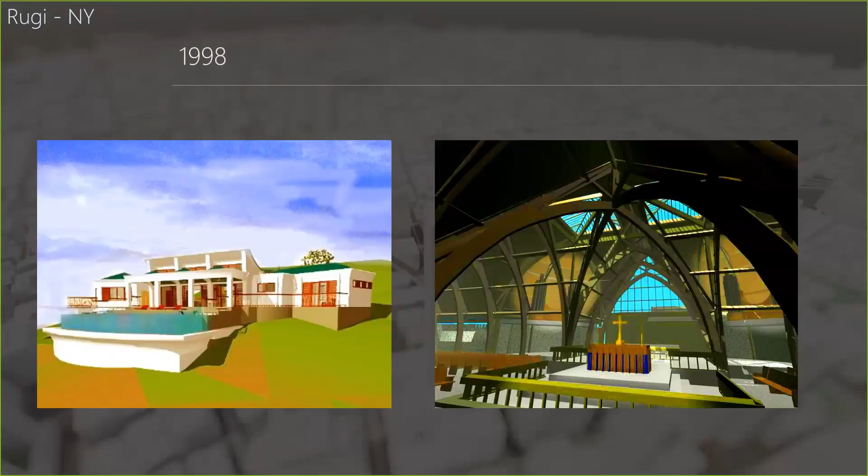My first Revit project was the Lincoln Center Theater in New York City. This was Revit 2.0, I believe—I started using it around 2001. We started in ArchiCAD, and then Revit came out, and I was like, this is the way to go. We started modeling that and actually doing ductwork coordination back then. And I was thinking, within 4 or 5 years, the whole industry is going to use BIM 100%—there's no way you're going to use CAD after this.

And I feel there's still a lot of offices with one leg in CAD, one leg in BIM and Revit and so forth. So it's just funny looking back—it still kind of looks the same, Revit. You can see there were a lot of issues we found there, a lot of big stuff in this tight rehearsal space on the Lincoln Center Theater. It's a phenomenal building, it was a lot of fun working—well, my first project in New York City.

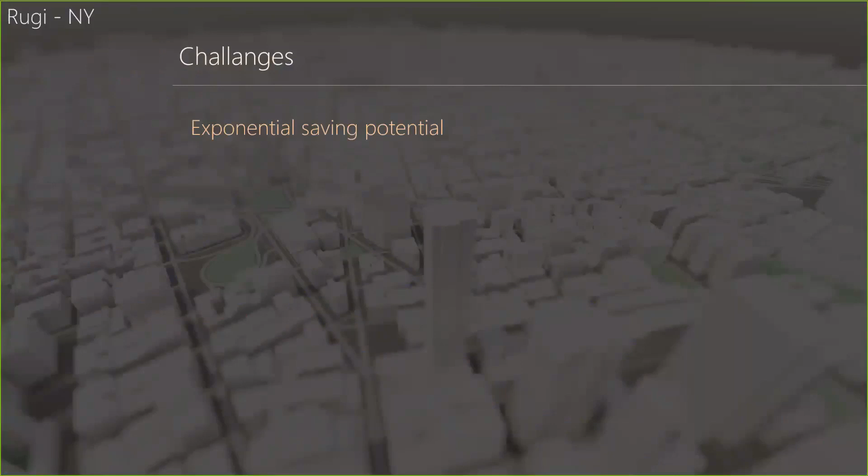So, not 20, 19, 18 years later, we're still having challenges implementing the technology across the board. My team is sort of vertically integrated—we have architects, engineers, construction managers, and now even facilities management in-house. We're finding there's exponential savings. In certain areas we can save 90% of time through automation of drawing generation, but the most important thing is the data that we're really harvesting and working with.

But as I mentioned, it's also exponential complexity if not managed properly, and I think that's what happens in many cases. What we're noticing, looking at most architecture firms, is the 'I' in BIM is not really considered at all—the goal is really creating drawings and renderings, which I understand why, but I think there's a lot of missed opportunities.

And I think it's starting to happen—more people are learning programming and using Dynamo in Revit, things like that. So you can actually start becoming aware of the power of these tools from a data perspective.

I think a big part there is during construction, it's kind of all about data. The weird thing in the construction industry I'm seeing is they're not data people working there. So I think a way of connecting this stuff together is what we're focusing on now. We call it VDCO, Virtual Design Construction, and we added operations 2 years ago because we're working a lot for owners and agencies in New York, implementing this kind of stuff. The real beneficiaries are the owners if they operate their own buildings, there's so much they can do with the data coming out of this. But if it's just a disorganized mess of data coming at them, they don't know what to do with it. So it's all about how to organize that data.

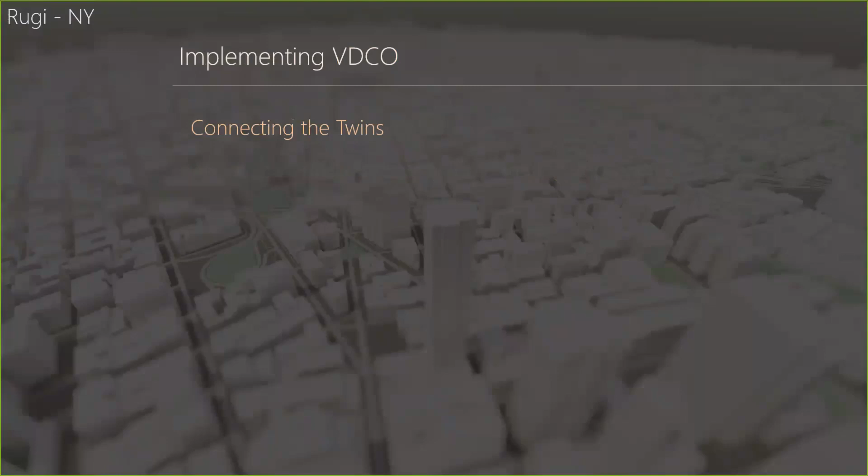Talk about digital twin - it's really connecting the virtual and the real together. Because now we have the digital twin, but is it connected to reality? Not really in most cases. The moment you hit the construction site, they're starting to have models in the field and things like that, but the whole thing of really connecting it to the day-to-day inspections, installations, and so forth - it's getting there, and it's coming really quickly, and I'm very excited about that.

One thing we realize is the different lenses, right? Design and architect look at something in a certain way, the MEP look at it in a certain way. All the different consultants have their way of looking at the same project, but they want something different out of it. Same thing with contractors and owners. So you have a list of the people - planning, design, project support, cost estimators, schedulers - there's so many people involved on a project, and they have their thing they want to get out of it.

The trick is, how do you get them all to work off the same data source and make it work? So we're standardizing the underlying data for this stuff, and it works when it's standardized, but there isn't any standard out there. So that's one thing we're trying to get to - can we agree on some sort of data standards here?

What I'm focusing my career on right now is the delivery points between, because that's where the inefficiencies really happen. From planning, design, and procurement, depending on what kind of delivery model you have - but this is the sort of traditional common one, especially in New York. It goes to bid, and the contractor does it, then the handover and operations. In many ways, you start from scratch every single time, and the bigger the project is, the bigger the chaos. We're involved in some massive projects, and it's just baffling that there's no connectors between the different phases.

This is sort of the mission statement of my group - making it easier for the whole team, every person. But this really comes down to people in the end. How do you get people to work together, communicate? You understand the problems and communicate that. And that's one of the problems in this industry - it's hard to identify the issues.

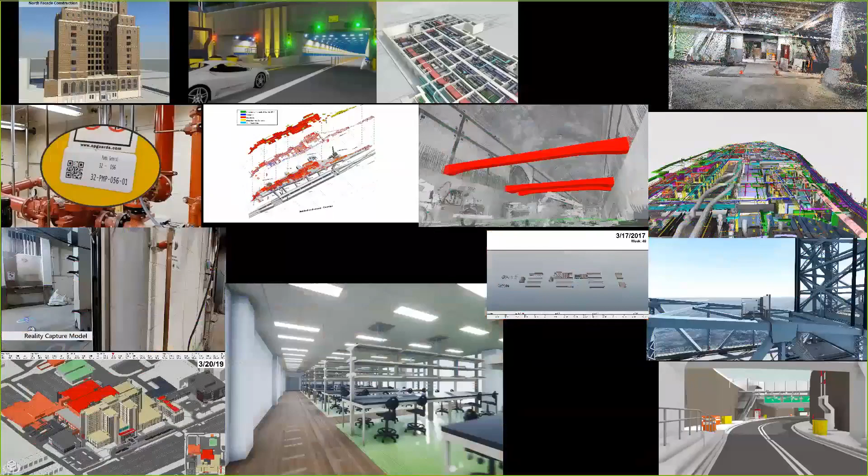So I've been with LiRo since 2000. I've been on over 100 projects now. We're talking about a lot of projects, we're working on things right now. This is a snapshot, but very close to all the different infrastructure - train stations, massive dollars, hospitals, schools, police and fire stations, tunnels, bridges. The data structures are the same, maybe how you organize a tremendous amount of them differs.

So I was going to go next. I talked previously here about it, but after that I'll go into detail. I think what's interesting is we've been involved for 7 years now on this project, the biggest infrastructure project in the United States, and it may be the biggest in the world. I was told by others 2 years ago that maybe it's a bigger project out there - I don't know, but it's a massive amount of models to be connected.

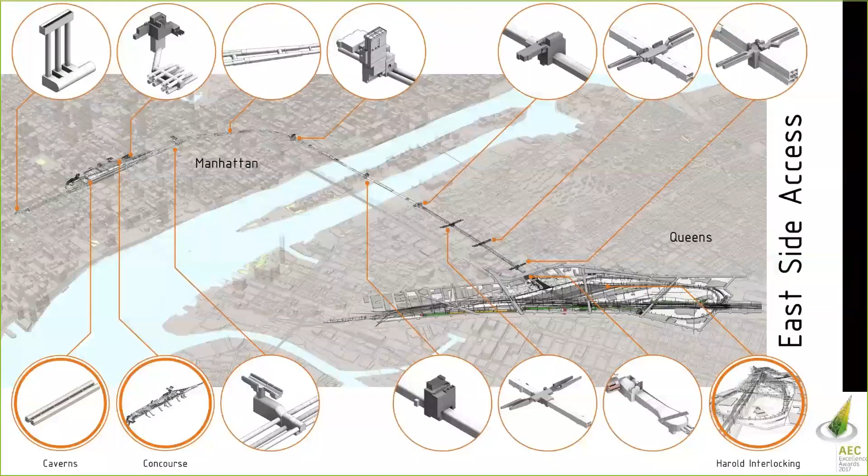Also talking about finding similarities, we're dealing with pretty much every agency in New York: MTA, CUNY, DASNY, the Department of Design and Construction, EDC, the Economic Development Corporation. You see the same problems everywhere - communication, documentation, fragmentation. We're running pilots with all these organizations, and you realize when you actually connect yourself, a lot of these issues go away, and we can start seeing what the real problems are.

So it's really form and data - that's what we're looking at in my group. This is really where we're creating, and BIM is about that: the geometry and the data you're logging. The way our approach now is using Revit as the form and data repository, connecting it to a database.

Not all data needs to live in the Revit model, but we're creating connectors, and this is where it gets really interesting, because we can shoot data back to Revit, spit out graphics, reporting, and things like that, using automation as an interesting tool. What makes Revit unique is that you can create drawings from the model - there's not many other software you can do that so well and still have 3D.

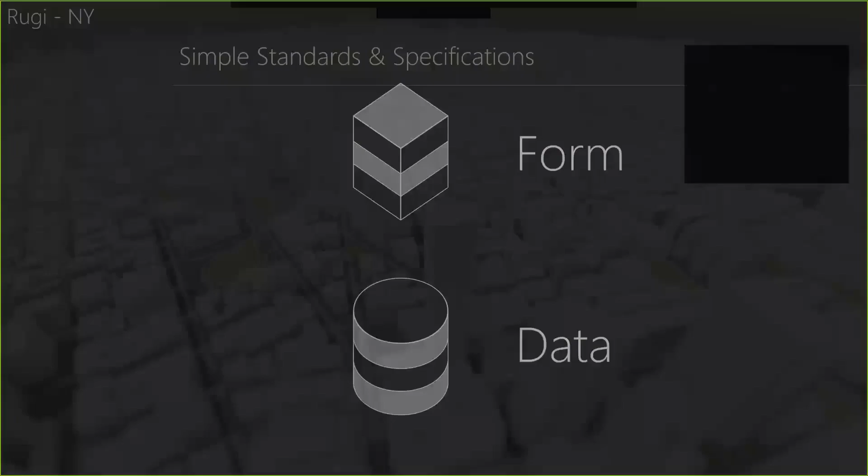One thing we realized is we can't do this, and we're not going to model everything in-house. So for example, today on Bridges and Tunnels, we wrote the standards - writing the data standards, writing the breakdowns, but doing it in a simple way. Has anyone seen the National BIM Standard? Has anyone read it? No, exactly. So our approach is really to shrink it down to the bare minimum.

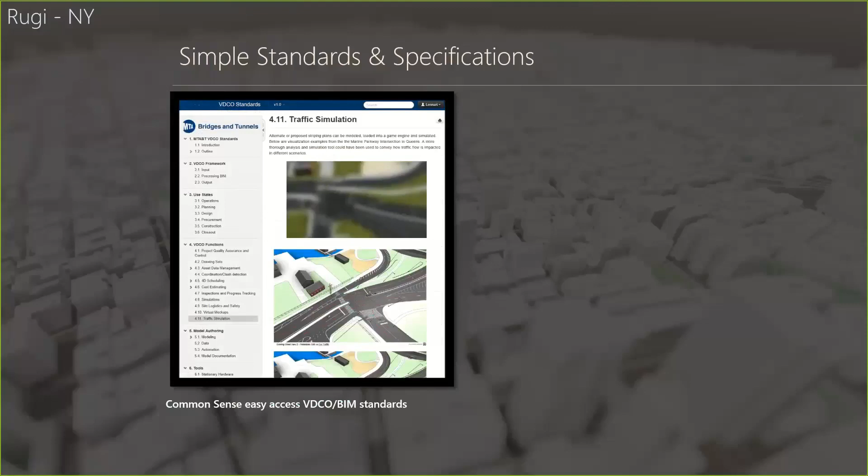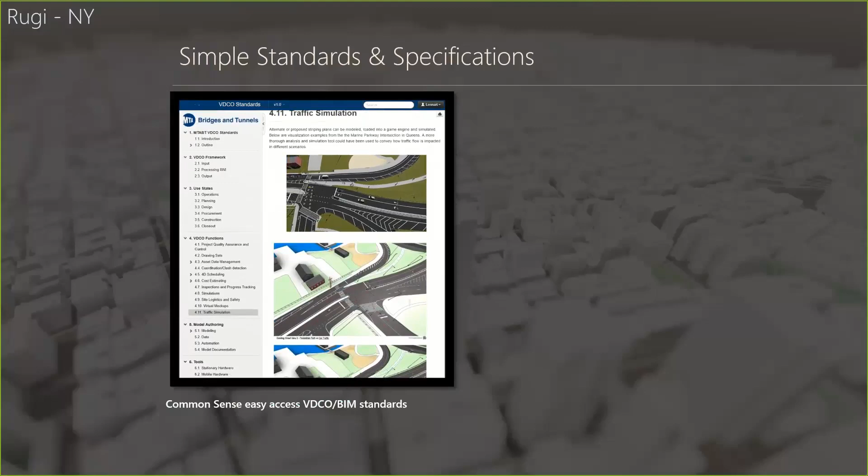It's actually people who read this stuff, and we created a website instead of a binder. You can browse through it, and there are real examples, tutorials, and things like that, so people actually engage and learn this stuff. We find people actually start wanting to read these things, because it's not just fun, it's illustrating, and you're actually learning something by doing it.

So we're digitizing all the bridges and tunnels in New York, and we're saving them a tremendous amount of money. Their budget for the next 3 years is $2 billion, so it's a drop in the bucket, the stuff we're doing.

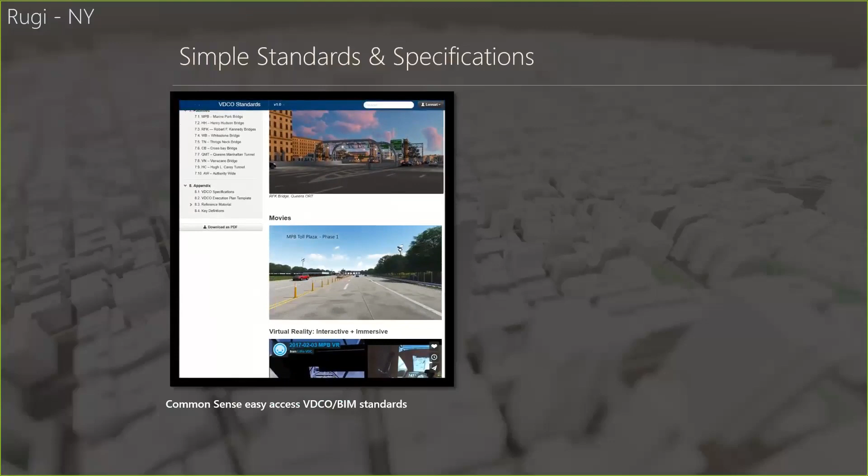But really, using Revit in the correct way, we're shooting it into visualization and game engines, then using the data to actually do phasing, putting cars in, communicating very quickly. We realize we can turn around some of these things in a day because we have the models set up, we're organized, and we spit them out.

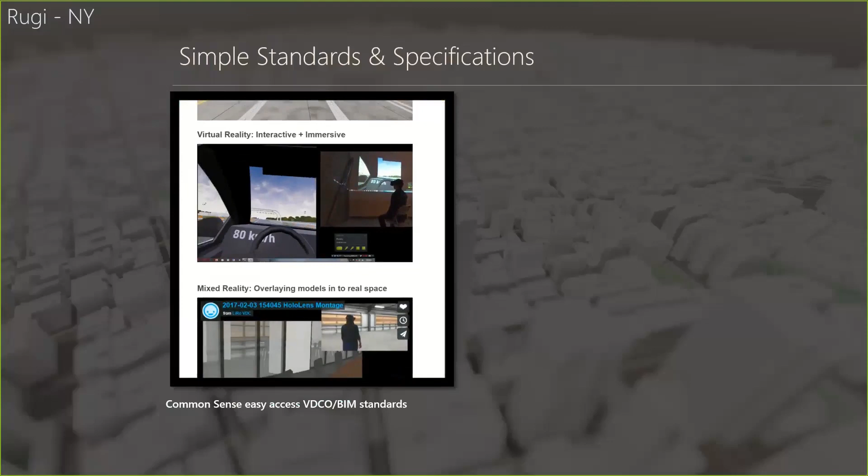Obviously, using game engines for virtual reality for this particular scenario, actually driving through has value. It's not just fun, but they can actually review how you experience this at 40 miles an hour and so forth. So it's the stuff around Revit now that is really becoming where people are interfacing.

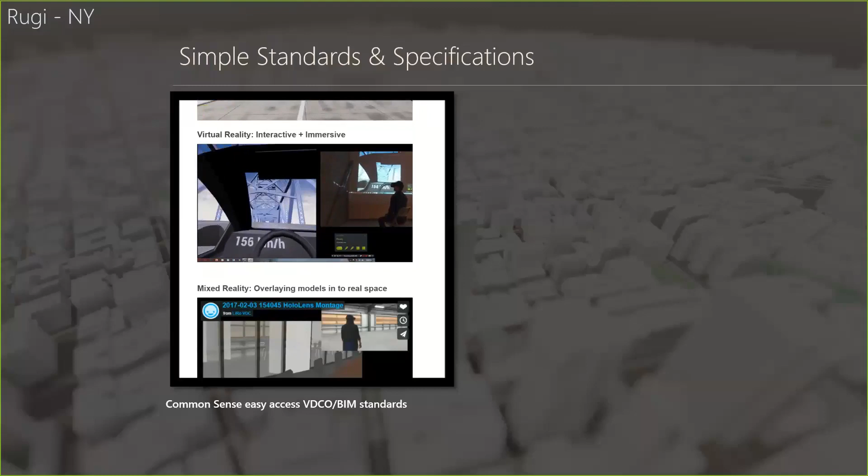I think having to send people to training to be able to be part of the BIM process is not going to work, because you have so many people involved, and people come and go. So we're finding we have to make it simple for people to actually contribute data to the models - that's where we started to develop applications on top.

So in the field, you can then input statuses, give feedback, take pictures, shoot that back, and also connect to reality capture and so forth. That's going to jump to next.

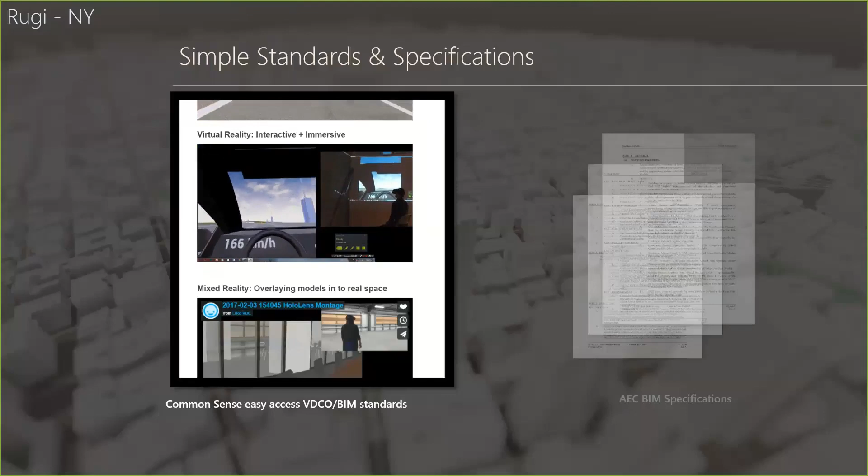And then we have written the BIM specifications, which is a very important aspect - the rules of the project, both for the designer and for the contractor, how they're going to run the job. It's really breaking down the key components in Revit, the settings, things like that, without getting too extensive. But these are the key things that we find really important.

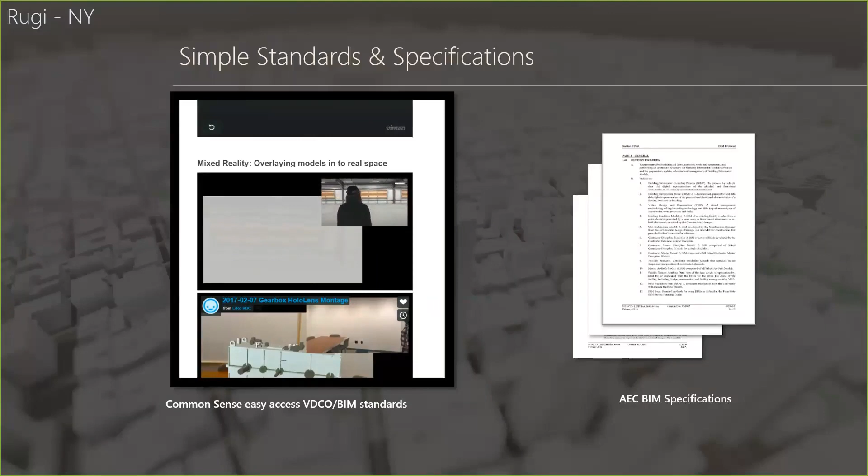So we go here - one thing we have, some guys from NavVis scanning. We actually acquired one of their scanners because we do so many big projects.

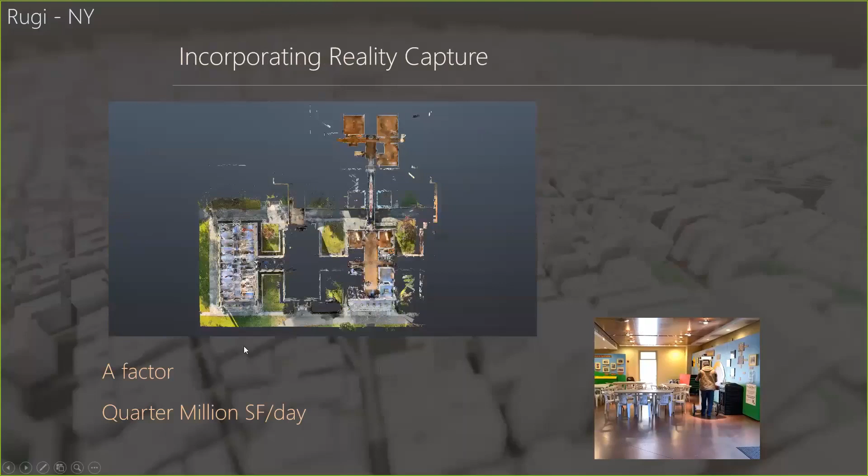What's cool with their technology is that you walk around and scan. We found a tenfold increase in the amount of scanning we can do, so we can do it 10 times faster than with the tripod scanners. So we can scan massive areas. This is actually a smaller piece of what's now the whole campus that we've scanned. We can interact with that and really look at it, and it's a game changer. We can quickly then generate models from this.

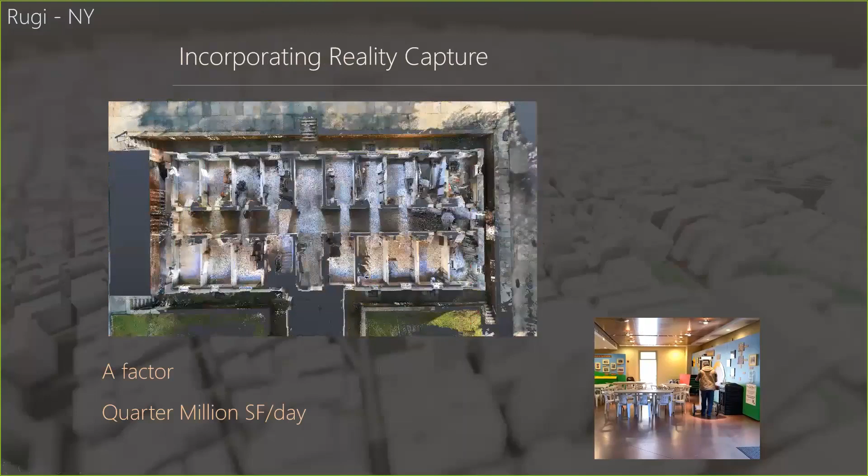What's really interesting with this also, I think, is this is Snug Harbor out in Staten Island that I didn't know anything about before we started this project. But it becomes a historical record as well, because they're going to renovate this place. This was where the sailors used to live when they were retired back in the day. Now it's going to be art studios and really cool spaces.

So how many people here use scanning in their practice? So say around half, right?

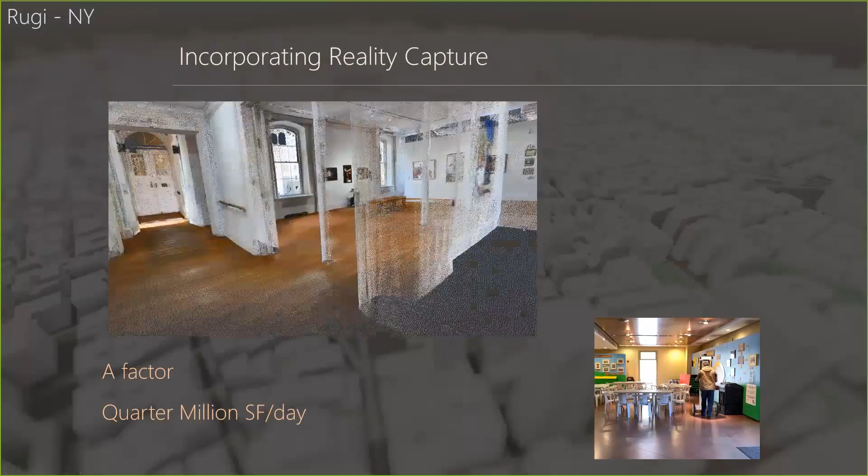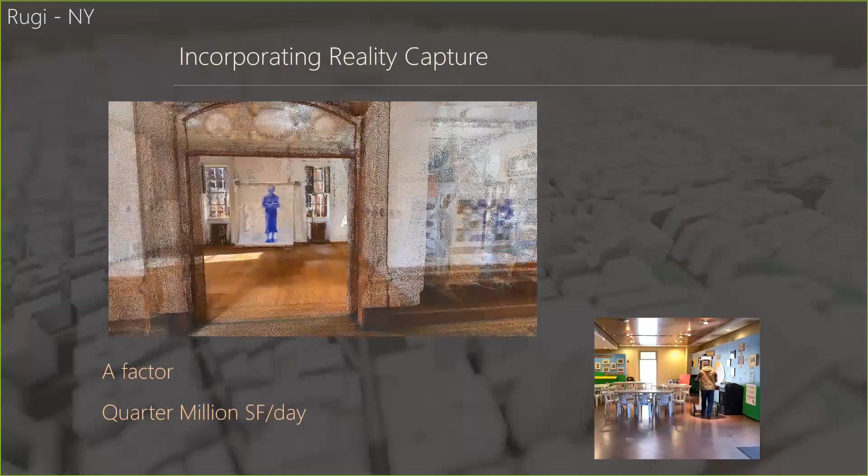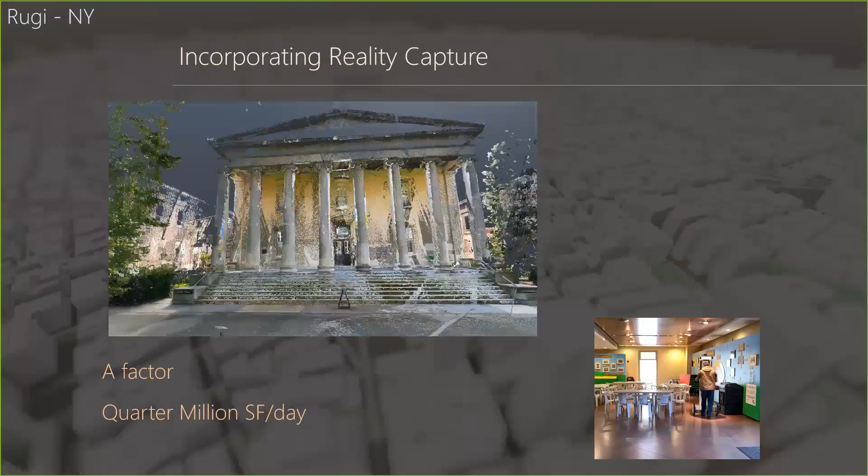One of the things we're realizing is that when you get that in and get a workflow in, it just elevates the standard of your project. And now we start using the scans and some of the viewers as a way of actually - so it's not about the point cloud only, but it's about the images and how you start interacting with the scan models and connecting that back to Revit and back and forth. So I'll go to the next slide here.

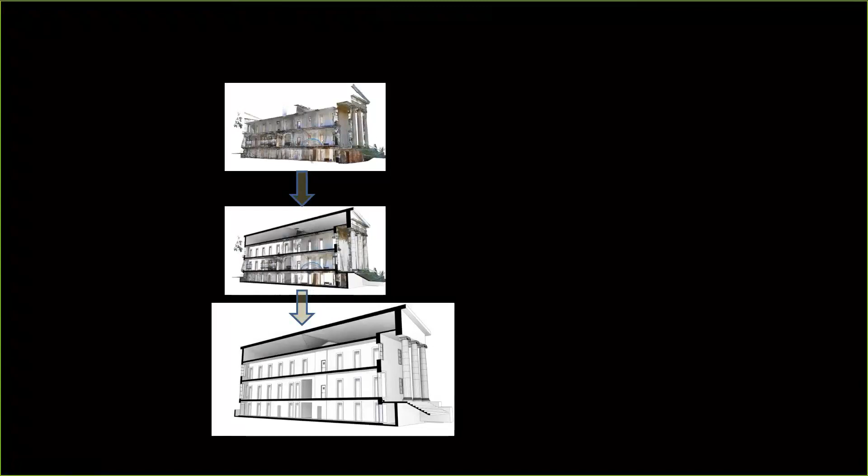What we're seeing though, the scanning and generation of models - it's a pretty manual process still, but there's a lot of tools coming out that I've heard about. Some you can already do some automated modeling with, but I don't think it's there yet. It's coming where you can do more feature extraction from the model, so you can cut down the modeling time of existing conditions tremendously, and then obviously spit out drawings.

We're using automation tools in our office, especially for high-rise buildings, that automatically create all the floor plans, all the sheets for those plans and occupancy. So say a 40-story building, we can set that up really, really quickly and then create many, many more drawings than a typical drawing set has.

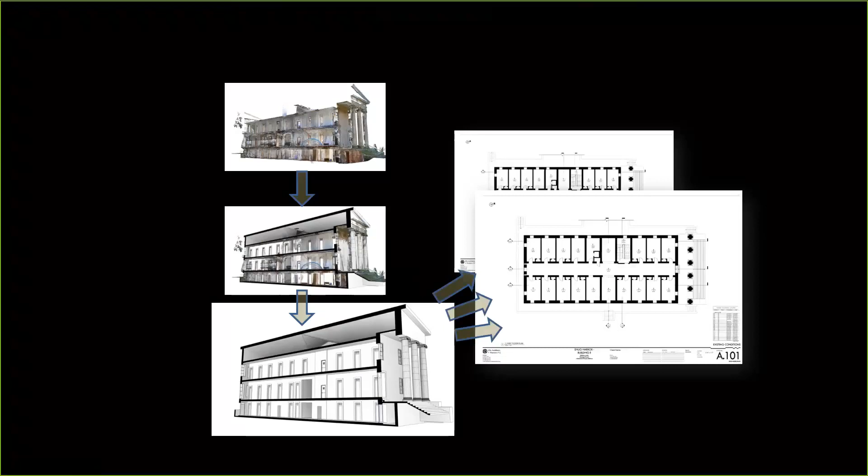We create what's called an asset management drawing set in design. So all the assets are already tagged and color-coded, so the facilities management department - we give it to them and say you guys fill out and see how you want this information. It really changes the game, because traditional drawing sets are split up by trade, and you realize the end user doesn't care about the trade. He cares about: is this equipment, how is that connected, how does it work for me? So it's really about overlaying everything and color-coding, making it easier for the end user.

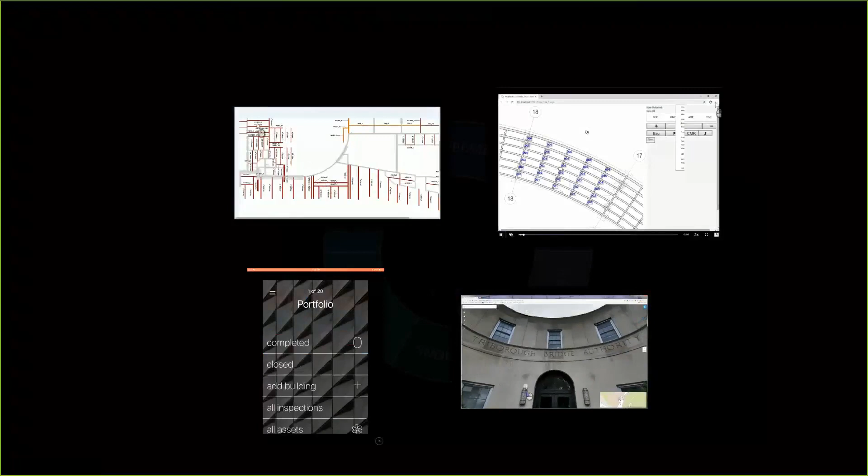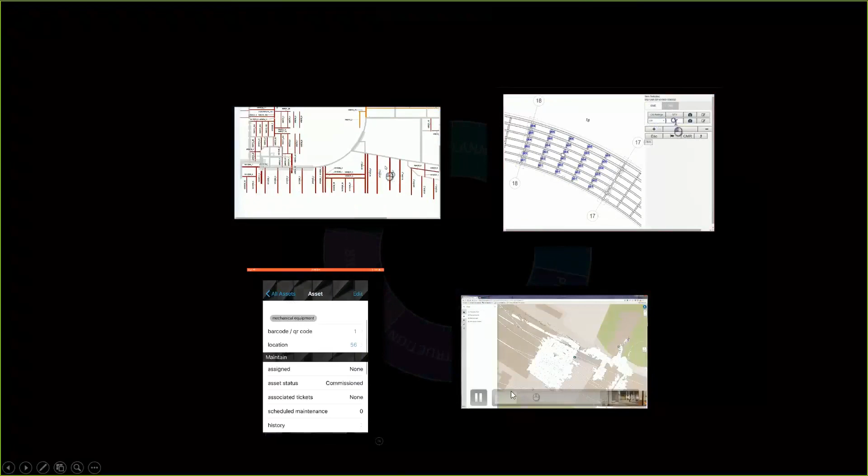So we're finding ways - we're using different apps for construction tracking, for inspections of existing facilities, facilities management tools, slapping QR codes on equipment as it's being installed, linking that back to the model. Also there's the scanner where we can then do massive facilities super quick.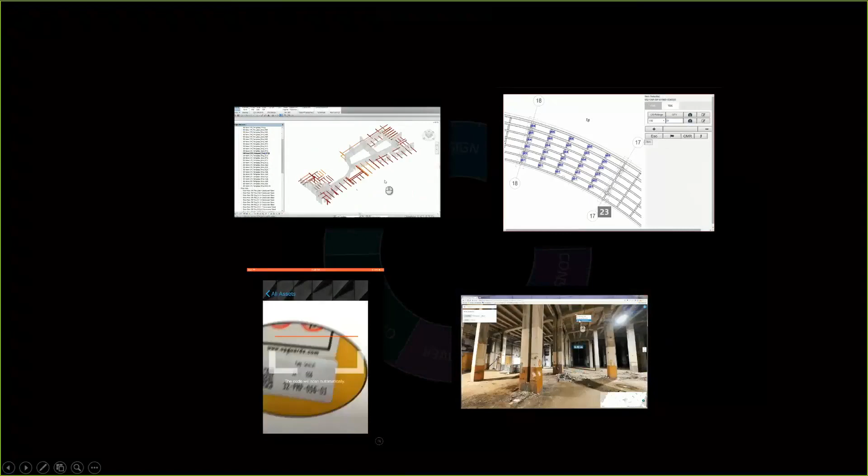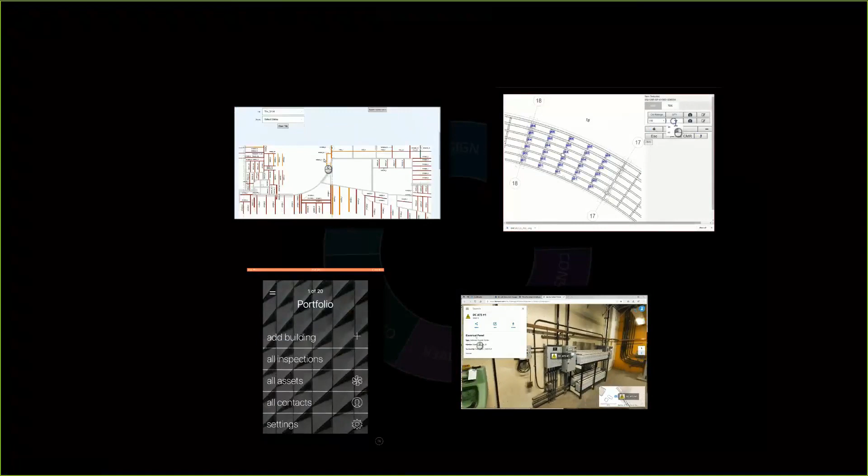It's a website, so our clients don't need to install a single piece of software. They need a connection to a web browser, and they can use all these tools. So it's really about making it easy for the end users to be part of the BIM process, because I think that's where it starts falling apart out in the field - the moment they have to install Revit or other costly software, they're not part of the process anymore.

So what I said - it needs to be standardized, and we're finding that when you do that, it has to be self-organizing in many ways with these softwares and things. So it doesn't just push a piece of paper behind - that's often what I see a lot of projects do - but it should guide itself as far as how things are input in the model, so the right people don't need training and stuff like that. So simplicity is the guiding principle for everything we do and develop.

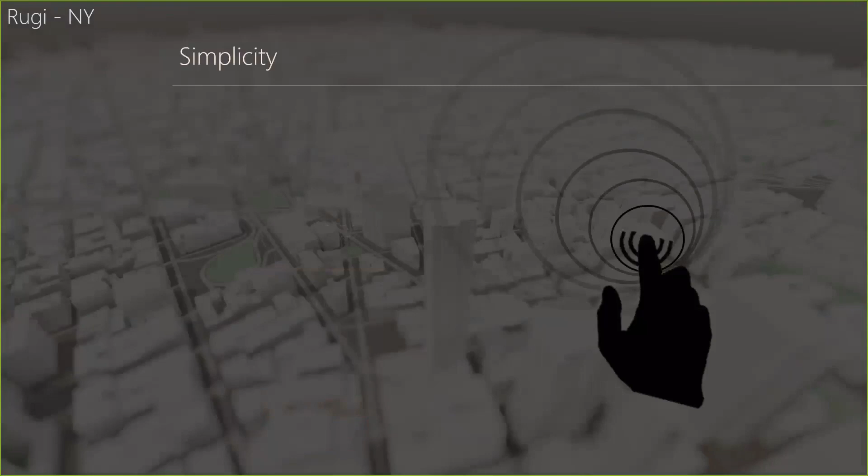We call this thing Form D for all the apps we're developing now, because we create forms, organize data in a very easy way, and fill out forms in the field using a simplified graphical interface so they can input data into the Revit model in the end.

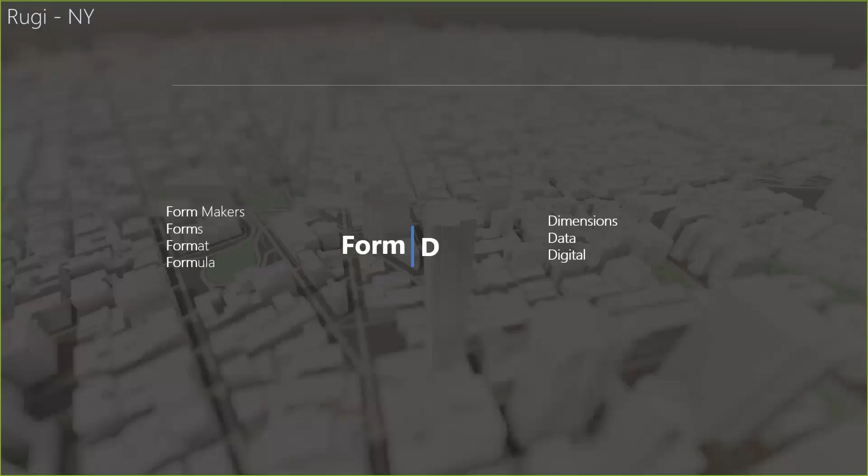They did a commercial for the American Society of Civil Engineers. What's interesting is the level of detail on the models now—existing conditions scanned into models, every nut and bolt fulfilled. Five years ago we couldn't do this because the model would be too unwieldy. It's all about how we organize it to break it down.

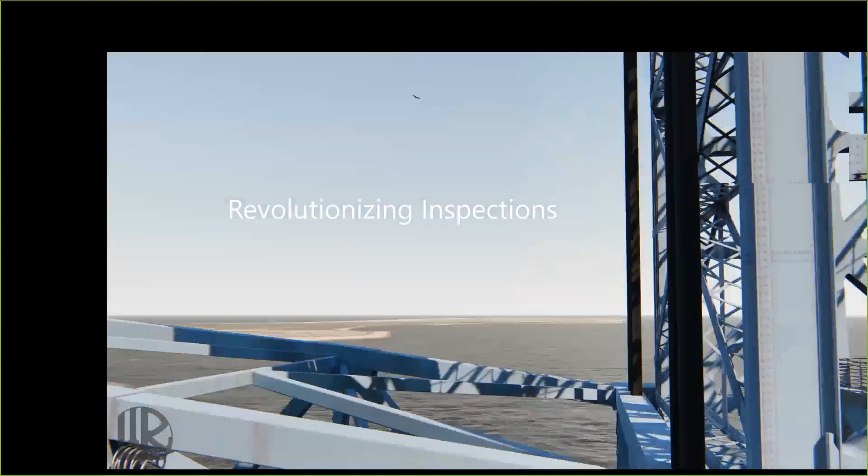But then we can do the true digital twin, simulations for parsing, even gravity simulations, and apps on top of that. We're running a pilot right now for the MTA bridges and tunnels—we scanned the whole facility in a couple of hours.

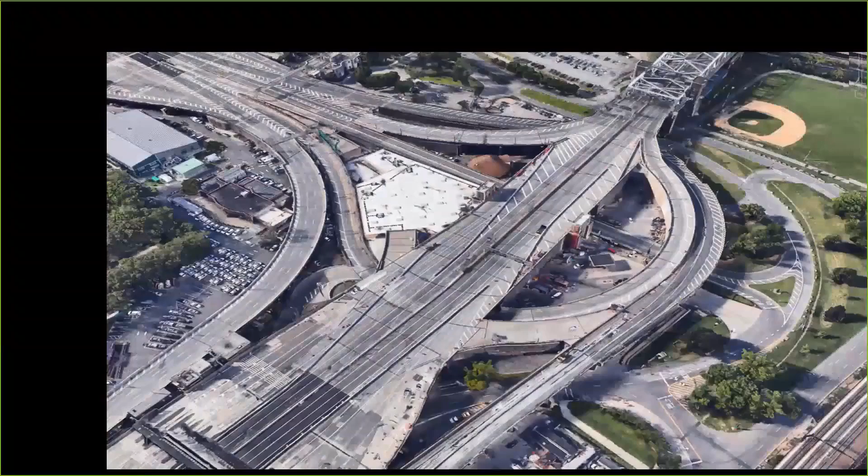We scanned this, generates models, and codes it automatically based on the system they're using—the universal bridge inspection format. This is a big deal; there's millions of data points.

Now there's an app where the guy in the field just clicks and sets the status. The amount of time they spent before on pieces of paper, taking pictures, and then months trying to assemble it all.

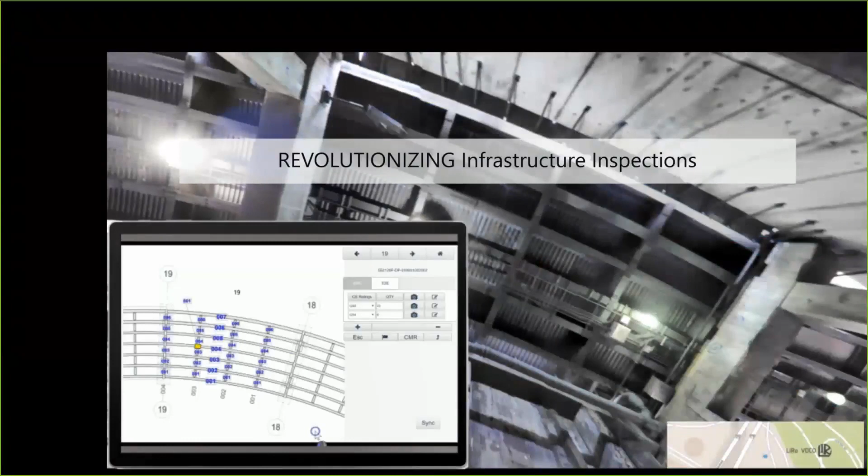It's now completely automated. You go out in the field, set the statuses, and it color codes everything based on status, so you can communicate what needs to be fixed, what's critical, and help plan. This is one of their reports, right there on the left.

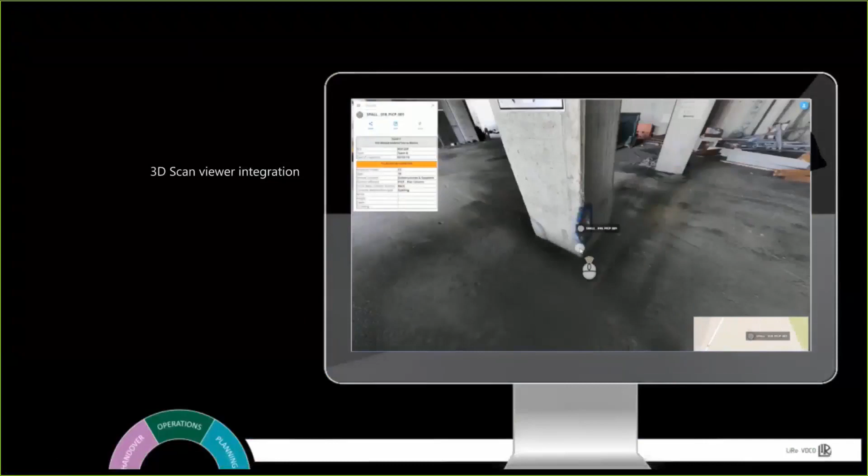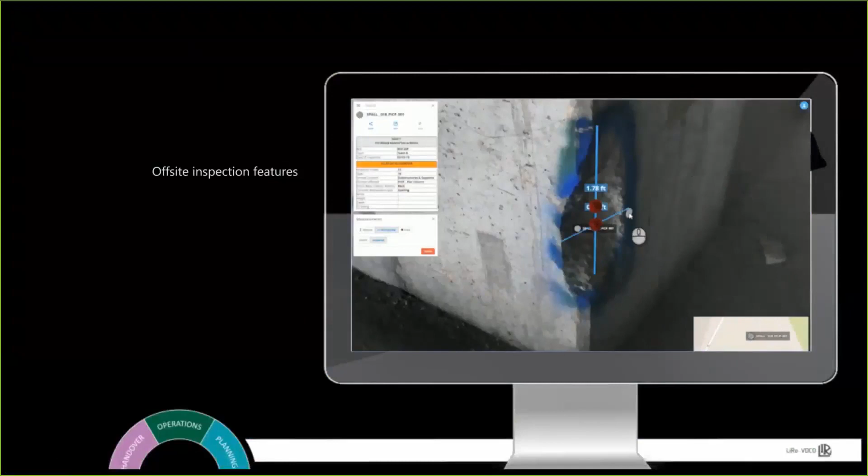It's an enormous report. We're digitizing that as well, tying it back to the Navisworks viewer, where all the issues found get shot back into the viewer. Someone can sit in their office and actually look at the issues and even measure them there—really cool stuff, because the BIM model is aligned with the scan model.

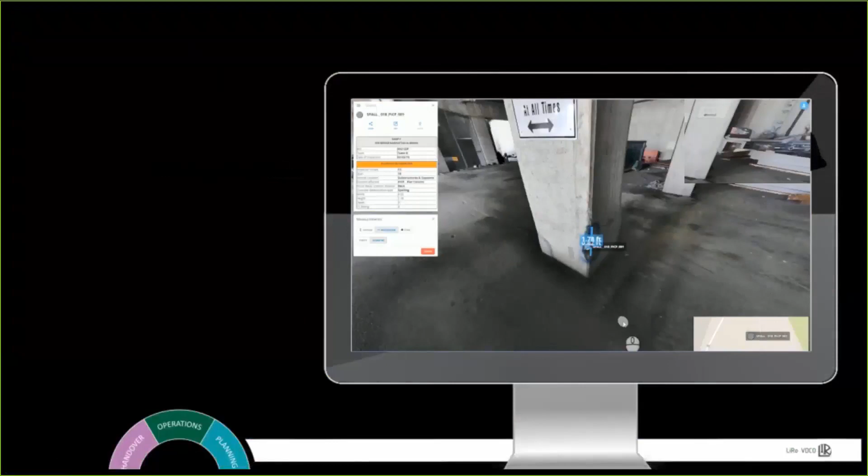The scan model doesn't go away—it's interconnected with Revit, and the data in the inspection app gets shot back to Revit, which shoots the data back here. So anyone can virtually walk through the facility and understand the issue instead of traveling across the city to look at that crack.

They're spending $28 million a year just on design documentation for existing facilities and repairs—it's nuts. We think we can automate a lot of that and probably cut it down 80%, saving tremendous amounts of money that we'd otherwise repay every time we drive these bridges.

They have tremendous problems tracking their stuff, and this really uses Revit's capability of tagging and creating drawings—breaking it all down properly.

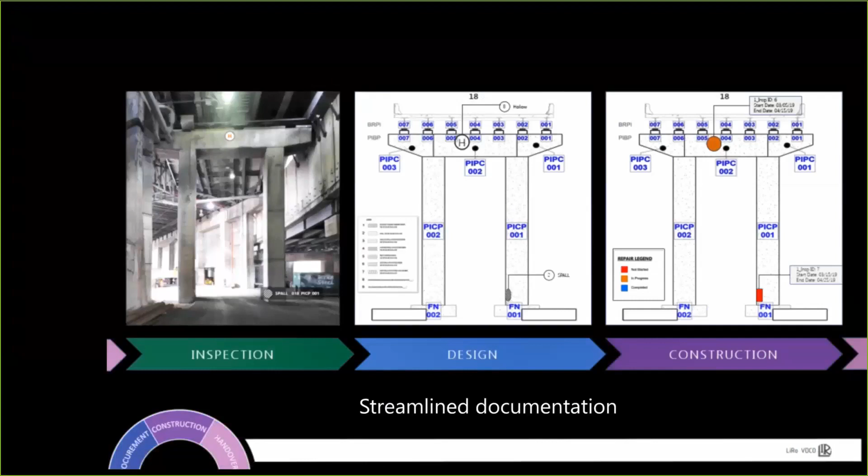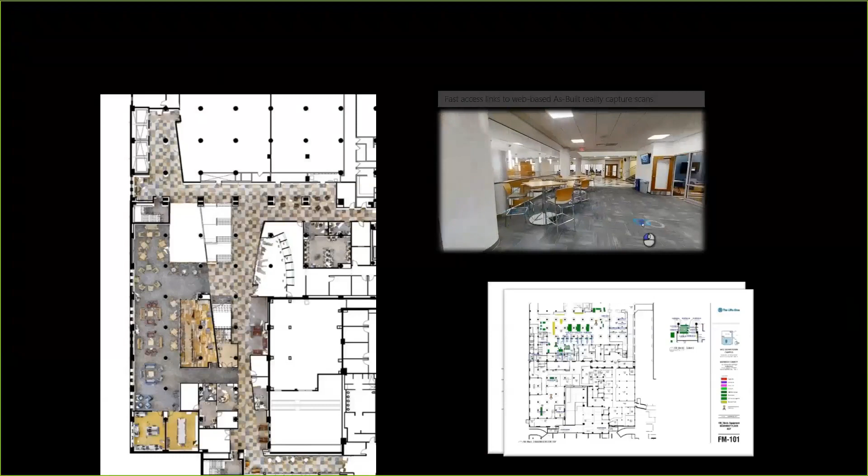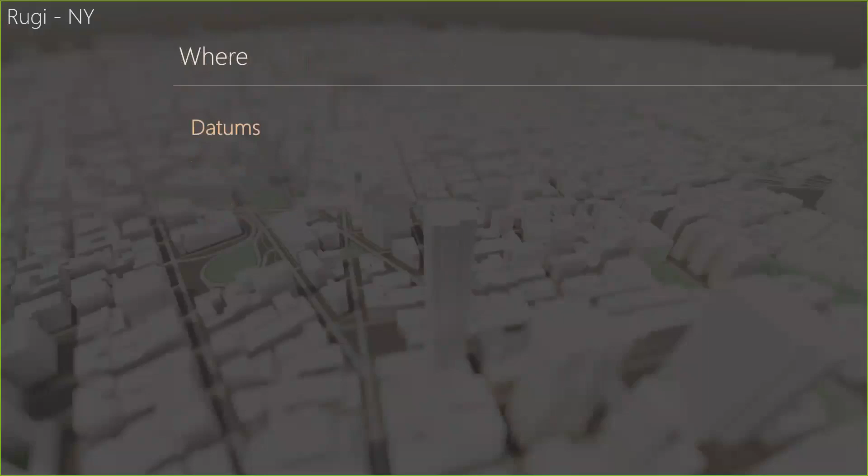What's nice with this is that all the Revit models pop into the city—we work in a sort of city model now, and all our projects pop into place. I think this is where things should be going: you submit to the building department and it pops into place, and the location becomes very important because of how it relates to the surrounding infrastructure, the city, and so forth.

So yeah, what it is. It's very Revit centric here. We break it down. We spend a lot of time setting up work sets. Work sets came out of Revit as a way of sharing and working together on a project. We are using that as a way of organizing how projects are actually shot into other software. I'll show some examples of that.

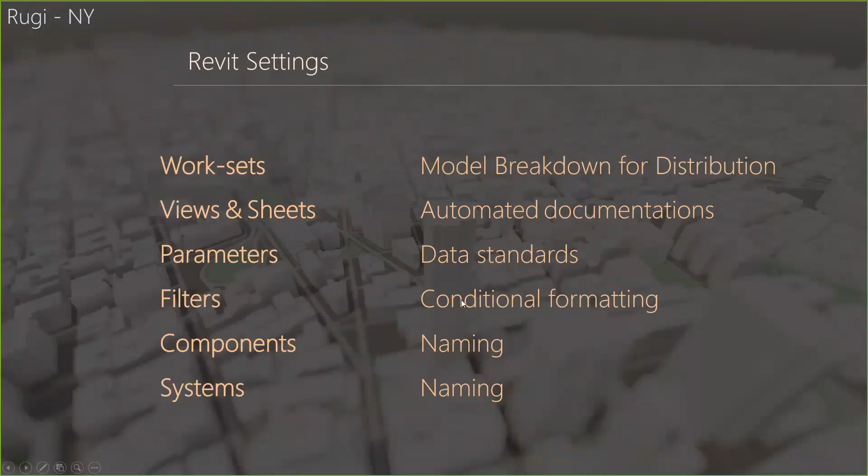Let's see, is it not going to this? Here. So I'm not going to go into complete detail, but we have a standardized thing with all the work sets we're using for all trades: civil, architecture, structure, mechanical, electrical, and so on.

And by standardizing that, we can automate how we shoot them to different systems for clash detection during design and construction, and also all other systems. So we don't spit out one model - we spit out every work set as a different model, and then we assemble that again, because it gives us great control for automated clash detection.

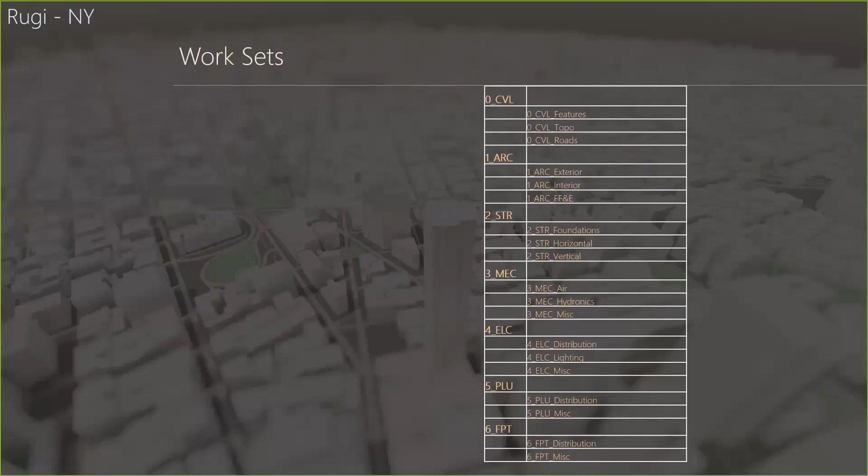Also for cost estimation, we've automated that for some of our clients. So keeping this organization is a tremendous amount of benefit.

View creation, we have standardized all that, and we have architects, structural engineers, MEP, and construction drawings, coordination drawings - I probably have 500 different drawing types. So this is just a little snapshot of an Excel sheet we do, and it's way too much to manually type in.

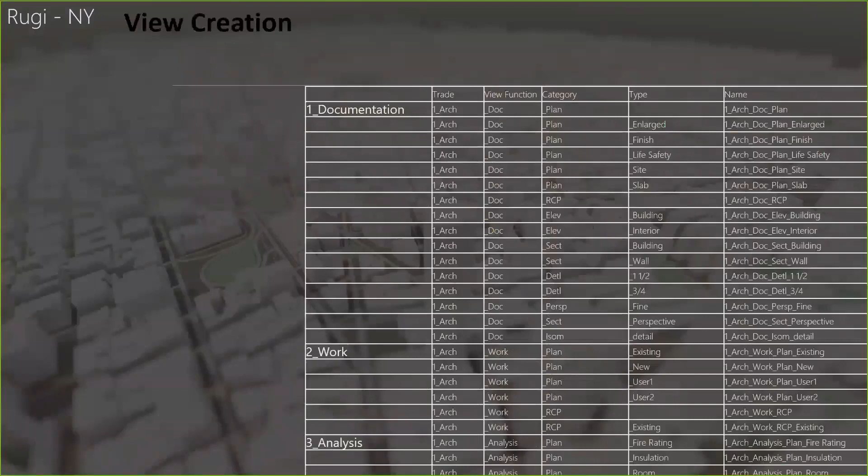So we actually built a plugin that automatically creates view templates in Revit, so it names the views. This just starts going by itself here. So it's creating that automation of - okay, we're going to do an architectural set - it just spits out all the plans, ceiling plans, finish plans. Automatically, you start focusing on the work.

Same thing for MEP, and then moving into coordination and operations, facilities management. So if you would print our drawing set, it would be nuts how thick it would be. But we're using the linkage thing in Revit too.

You already have this built into Revit - if you click on a level, you can go to that plan. So we actually create full interactive drawing sets where you can navigate around. There should be 3 clicks to go to any piece of your project. In the title block, you can click on what level you want to see, and it goes to the default floor plan there, and then you can go to what trade you want to see and things like that.

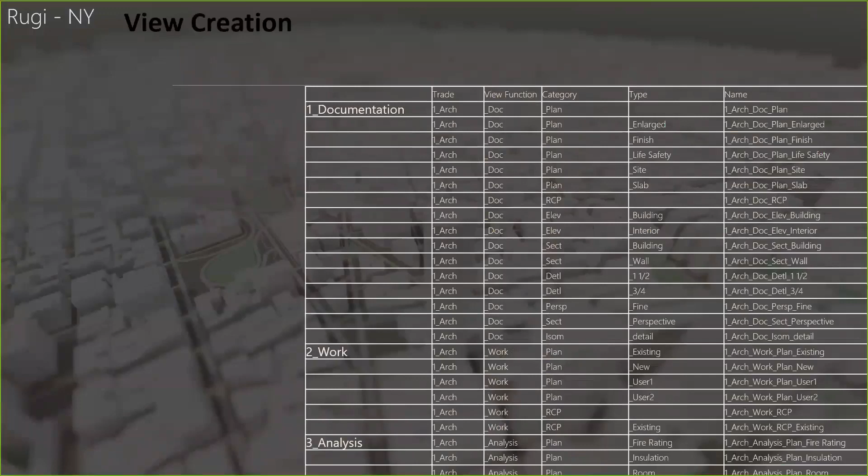So it's sort of using the built-in linkage in there, but automating that. It's changing things, like instead of physically flipping drawing sheets, you're clicking like a website environment, and it's a game changer. You'll find things much quicker that way. So I think that was my point, and then our parameters and so forth.

That was sort of the gist. I hope I'm throwing a lot of stuff at you. Any questions? We're preaching to the choir here. These are people who've been here a million times, they know what they're talking about.

So what do you guys think about this? It's very interesting to hear, because I think where I've become, I'm starting to look at it from the outside, architecture, MEP, all the different trades, because we do so much implementation for our owners now. But how Revit is used for coordination, for example, are there any questions regarding this?

Are you using the live model? Cloud models or anything like that? Oh, cloud models? Not for Revit, actually. We're shooting it out in the cloud, and they're trying different platforms.

And I think that's one of the things we're saying, as far as visualization, there's so much software out there. We're testing right now the cloud model, seeing what's the best environment to host in.

One of our issues is that we deal with legacy agencies that are extremely paranoid about the cloud. So it's been very hard for us, either they might have some web environment that is so old and outdated, so instead of doing it in-house and then posting the results or through an app. So it's one of those things we're dealing with.